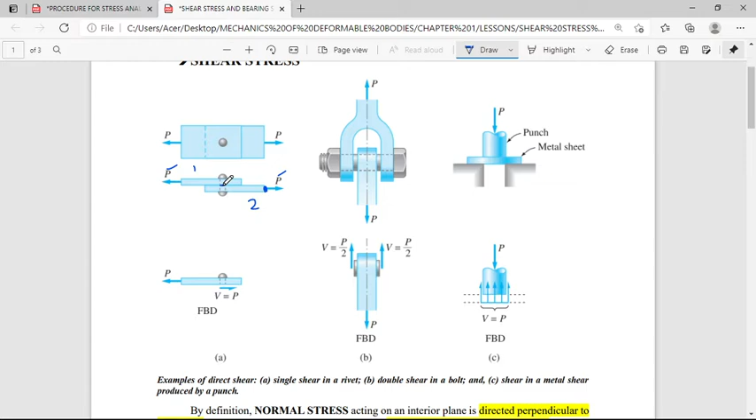Here, shown in the free body diagram, it was taken by method of section, assuming it will break in the middle. It's not just an assumption - by analytical investigation, you can actually show that it will fail or break here in the middle. So, V equals P when you construct a free body diagram.

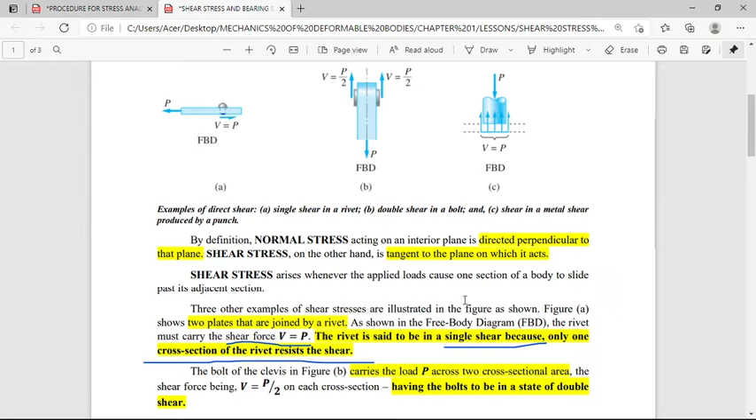Next is figure B, the double shear in a bolt. In figure B, the bolt of the clevis carries the load P across two cross-sectional areas. Where are those? You have two cross-sectional areas, area 1 and area 2, as I've drawn here.

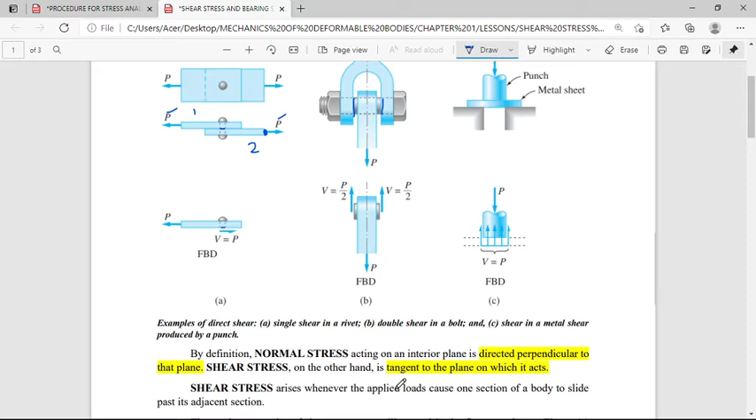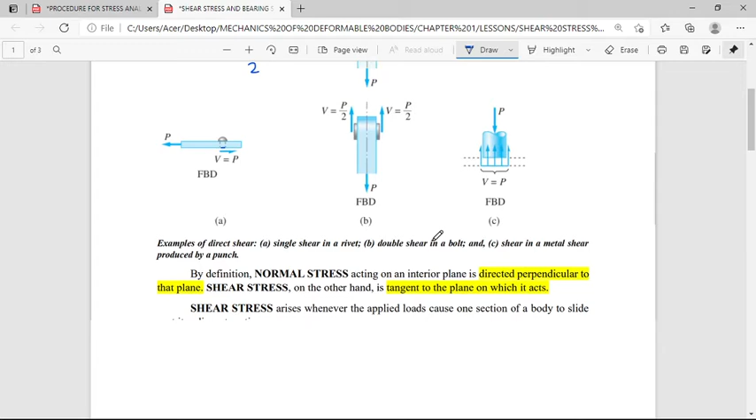Let's break it down. The shear force is V equals P over 2. Why? Because you need to consider two cross-sectional areas, as shown in the free body diagram. This P over 2 simply means your applied force P is divided into two, making the bolts be in a state of double shear.

For example, this clevis has two bodies you need to consider, and you connect them using a bolt. So when this force P exceeds the capacity of these two bodies or the bolt, what will happen is you'll get a double shear, which you can see through this cross section or these sides of the bolt.

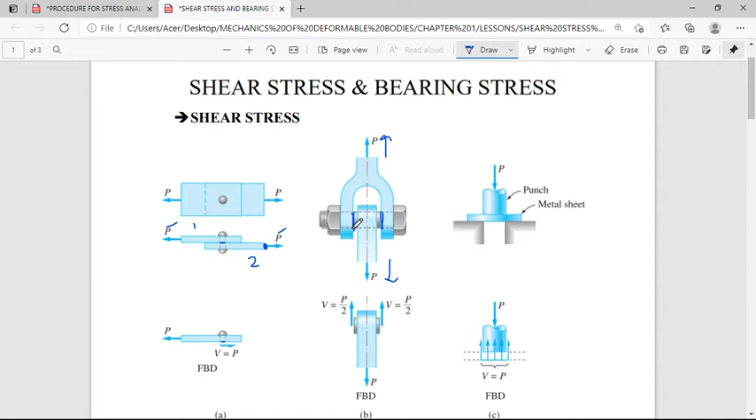Unlike the figure in the first part, or in figure A, here they are only connected on one side.

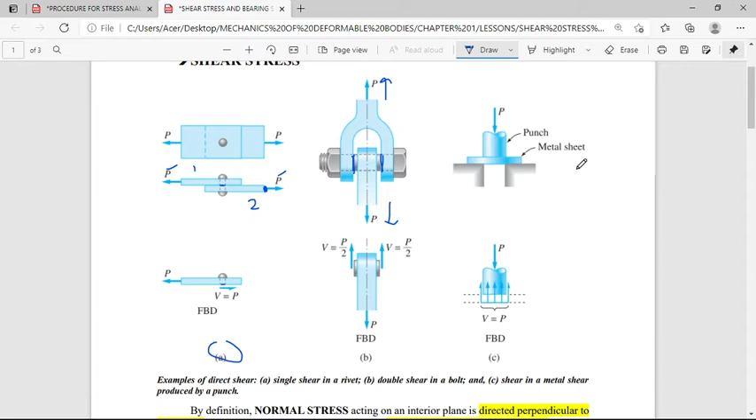Okay, so here's the free body diagram for double shear. Third, punching shear.

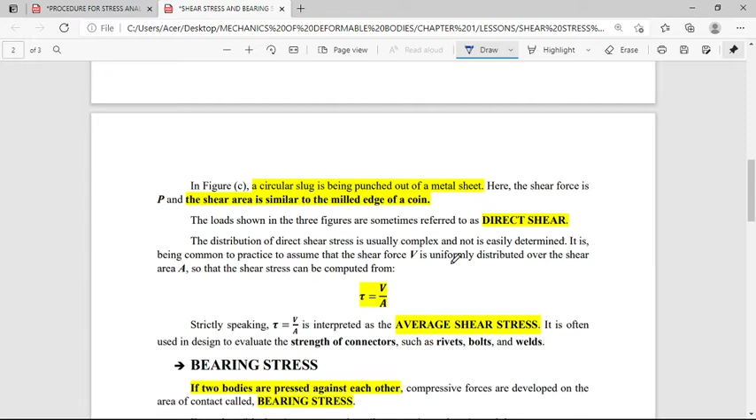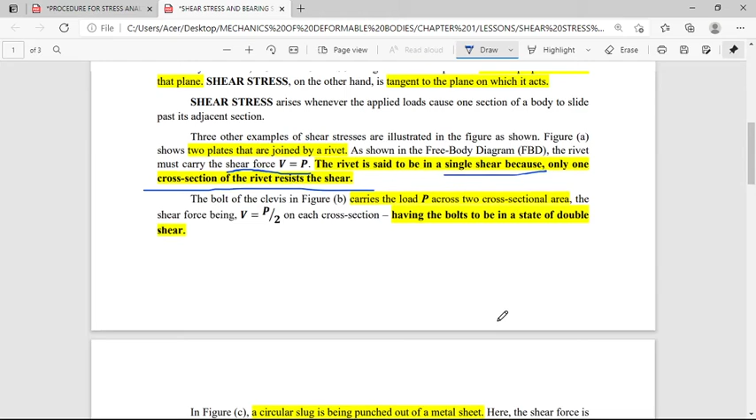So in figure C, a circular slug is being punched out of a metal sheet. From that phrase alone, you can already give a conclusion on what punching shear is.

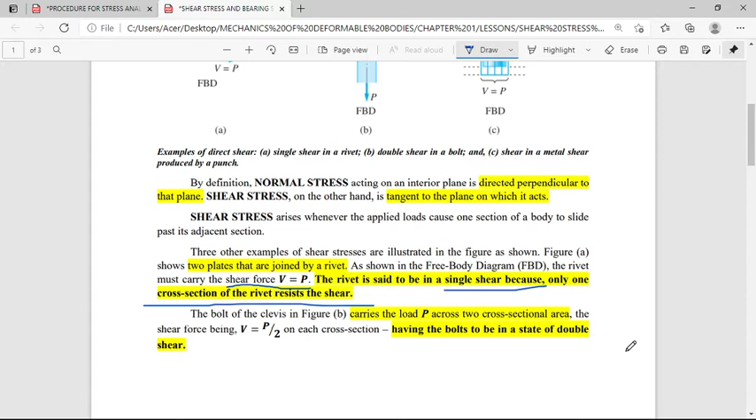So here, the shear force is P. We still consider P as the shear force. And the shear area is similar to the milled edge of a coin.

So what is the shear area? It's the area A, or the cross-sectional area A, that you need to consider or analyze before using our formula, stress equals P over A.

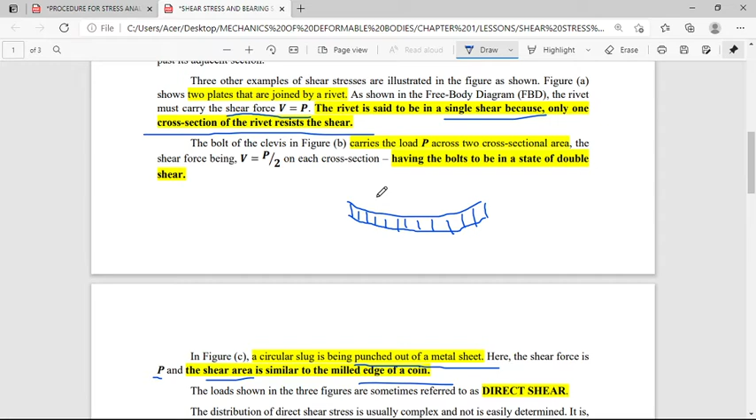So how do you solve for the length of that rectangle? Obviously, if you stretch it out or bring it back to its original circular shape, the length of the rectangle you get is the circumference C of the coin. Then, to finally solve for the area of this milled edge, which we consider as the shear area, the circumference C must be multiplied by the thickness T, whatever value is given for thickness T.

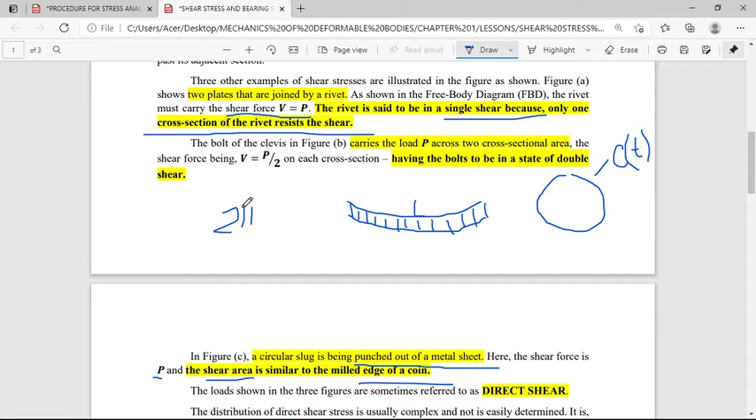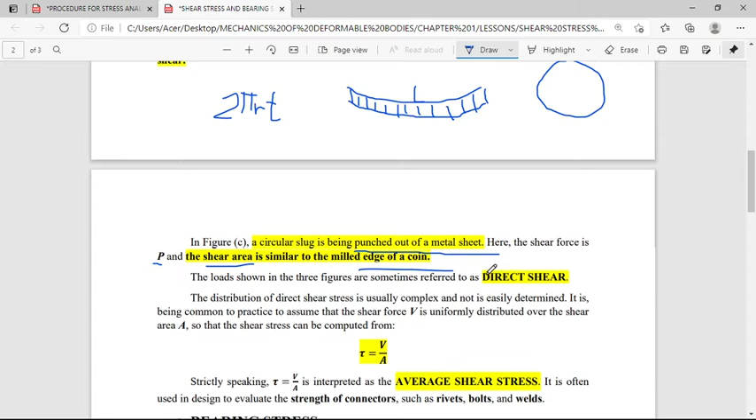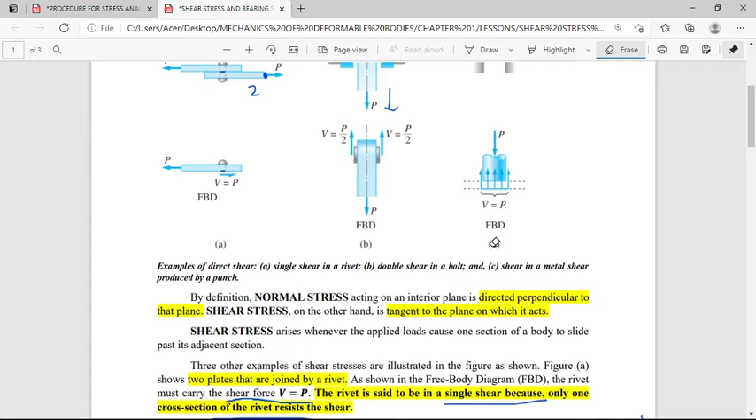So what is the formula for the circumference of a circle? Obviously it's just 2 pi r. Then 2 pi r times T. So that's the formula you'll use to solve for the area of the so-called milled edge of a coin, when visualizing in your mind what shear area to use for punching shear.

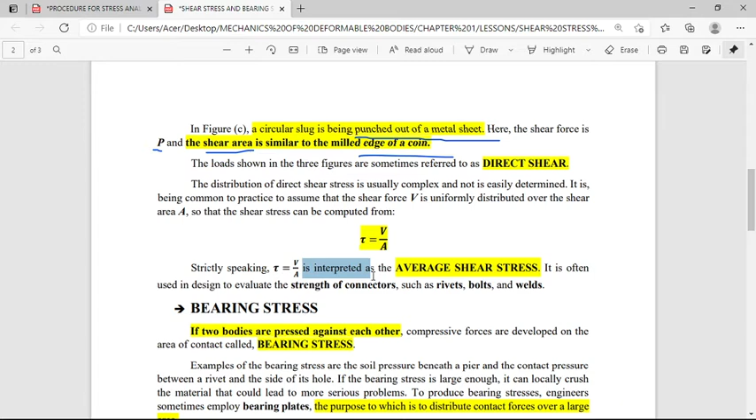So this is also derived from the formula P over A, or stress equals force over area. Strictly speaking, shear stress tau equal to shearing force V over A is interpreted as the average shear stress, and it is often used in design to evaluate the strength of connectors such as rivets, bolts, and welds.

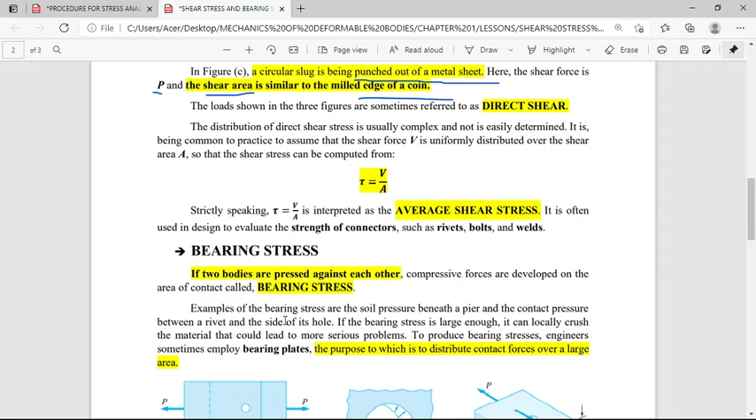Why is average shear stress used in designing or evaluating the strength of connectors such as rivets, bolts, and welds? We will learn this in the next part, bearing stress.

If two bodies are pressed against each other, compressive forces are developed on the area of contact called bearing stress. So what does this mean? Two bodies are pressed against each other.

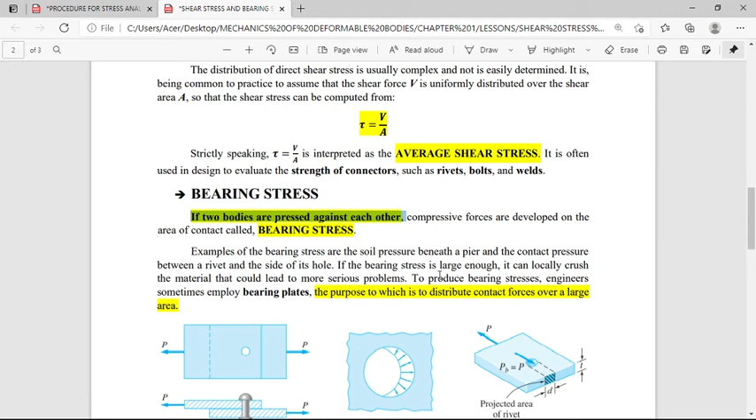For example, here in our figure, look at figure A, similar to figure A from the shearing stress topic above. Two bodies pressed against each other. Consider the top section of these two plates. Where is that top section? Here, this is the top section. Let's look only at the top section, remove the lower section.

So what are the two bodies being pressed against each other? Consider this plate as body number 1, and the body of the bolt as body number 2. So when force P acts on the plate, pulling it, or applying a tensile or compressive force, either way it will hit the body of this bolt or rivet. And what happens is the compressive forces develop at the area of contact. Where do they make contact? Obviously, at the body of the bolt and at the hole of the plate. That's what we call two bodies pressed against each other, and the result is what we call bearing stress.

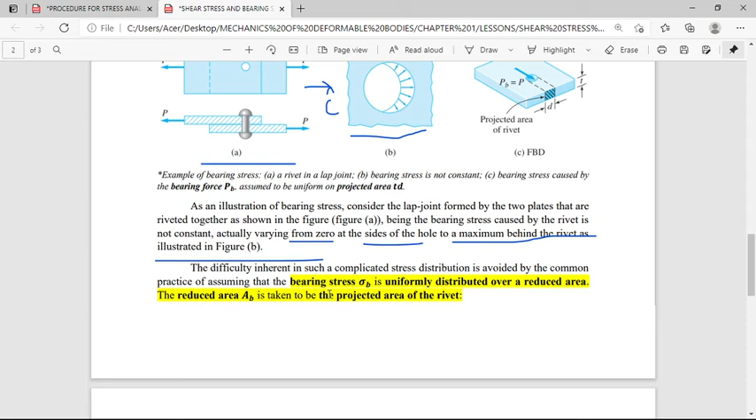The difficulty inherent in such complicated stress distribution is avoided by the common practice of assuming that the bearing stress is uniformly distributed over a reduced area.

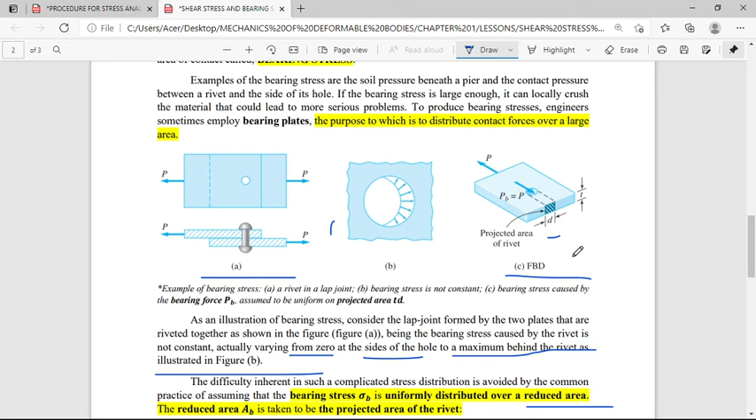So we come up with our formula: A sub B equals TD, where D is the diameter of the rivet and T is the thickness of the plate.

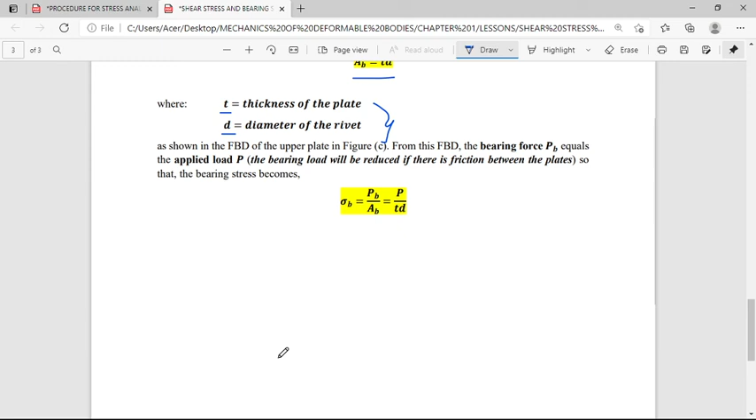As shown in the free body diagram of the upper plate in figure C, from this free body diagram, the bearing force P sub B equals the applied load P.

The bearing load will be reduced if there is friction between the plates - it will be reduced when friction acts between the plates.

So that the bearing stress becomes - let's come up with the formula. As I said, most formulas in mechanics of materials, for stresses, come from stress equals force P over the cross-sectional area A.

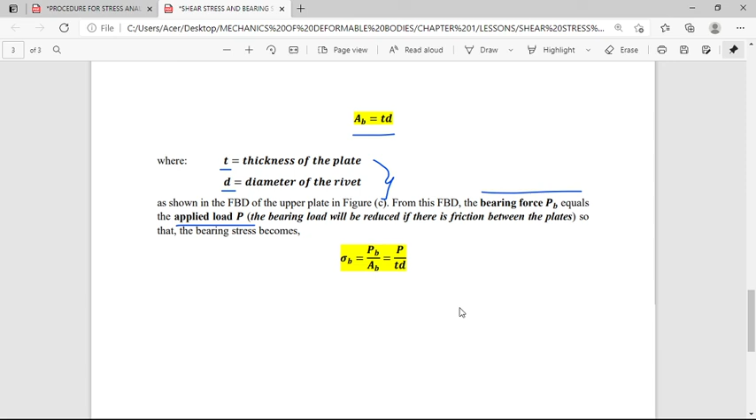So for bearing stress, in the formula for bearing stress, we have P sub B over A sub B, where P sub B is the bearing force, and it is equal to force P.

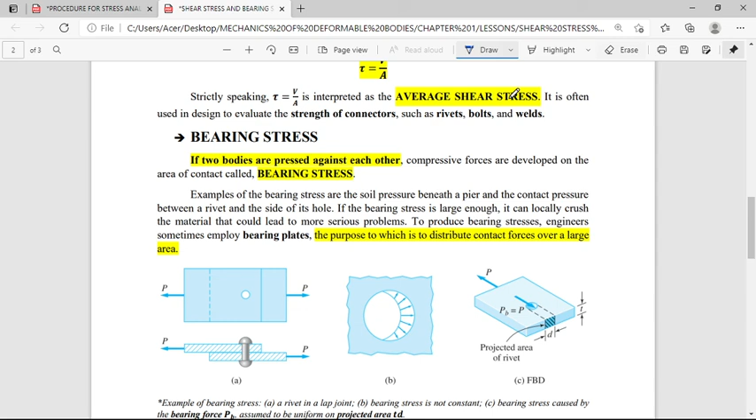Where is that force P? From these figures, you can see - here is force P, the external load that you apply to the body, or in our scenario, the plate, which transfers to the bolt and produces bearing stress on the plate.

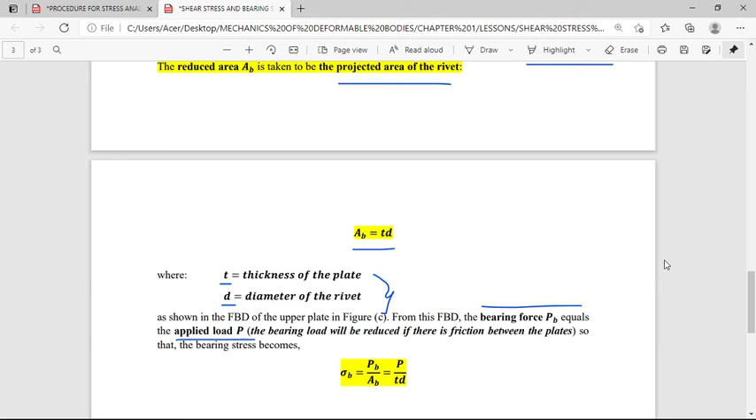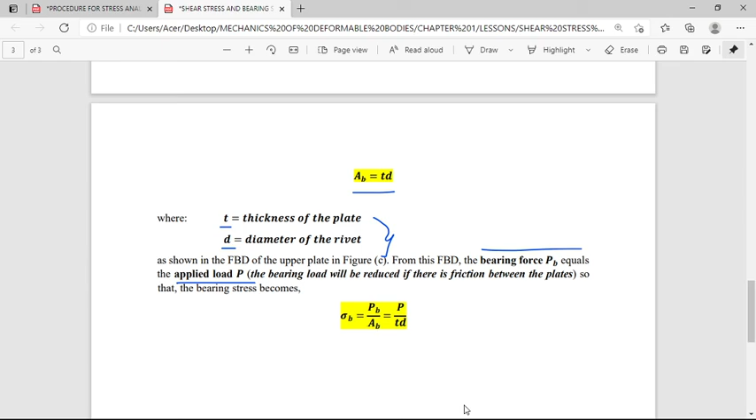That is force P, and force P is divided by our bearing area, or the reduced area, equal to the thickness of the plate T multiplied by the diameter of the rivet D - P over TD. So that concludes shear stress and bearing stress.